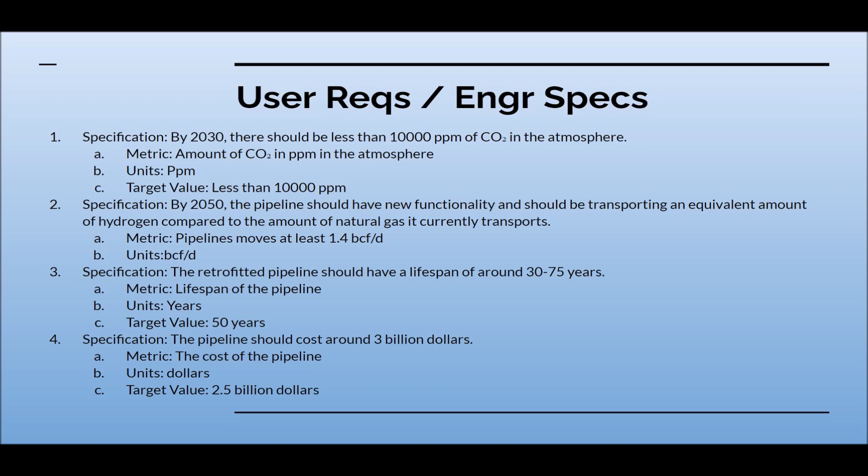The pipeline should cost around $3 billion, and our target value is $2.5 billion. From the case study of oil and gas pipelines, the average budget was $3.4 billion, but operating with hydrogen is much more expensive.

Pipeline projects using fossil fuels would normally gain a lot of opposition from indigenous people because their land is being taken, and in the event of oil spillage, there would be negative environmental impacts. Our pipeline uses hydrogen instead, so there would be opposition, but it would definitely be a lot less because hydrogen spillage wouldn't have massive negative environmental impacts.

Large corporations like Hyundai have started investing in hydrogen transportation by bringing hydrogen-powered vehicles into the commercial market. Commercially sold hydrogen-powered vehicles in use would decrease the amount of greenhouse gas emissions in units of tons.

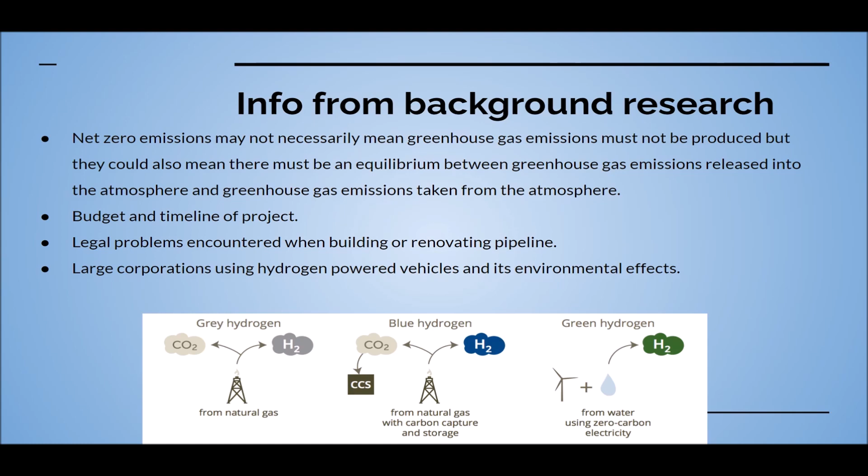We will be able to get the hydrogen by electrolysis of water and can use wind turbines to create energy to perform this process. We will use the existing pipelines as the path to transport the hydrogen, and they will be retrofitted in order to safely transport it.

The hydrogen will then be used as a clean energy source. It can be used to power hydrogen cars, generate electricity, and hopefully replace the sources of energy that cause a lot of greenhouse gases. As hydrogen is used as an energy source, the technology that will use it will increase, causing it to be a more and more energy efficient source and a viable option.

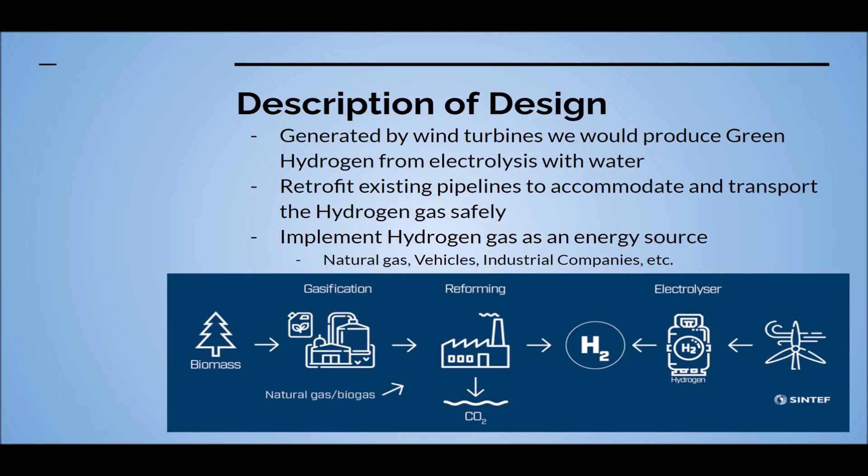Through transitioning to hydrogen pipelines, the goal of net zero greenhouse gas emissions by 2050 will be able to be met. The pipeline will need to be retrofitted to carry liquid hydrogen, but until then we'll be able to carry a blend of natural gas and hydrogen. With the proper modifications, the pipeline should have the ability to last a minimum of 50 years.

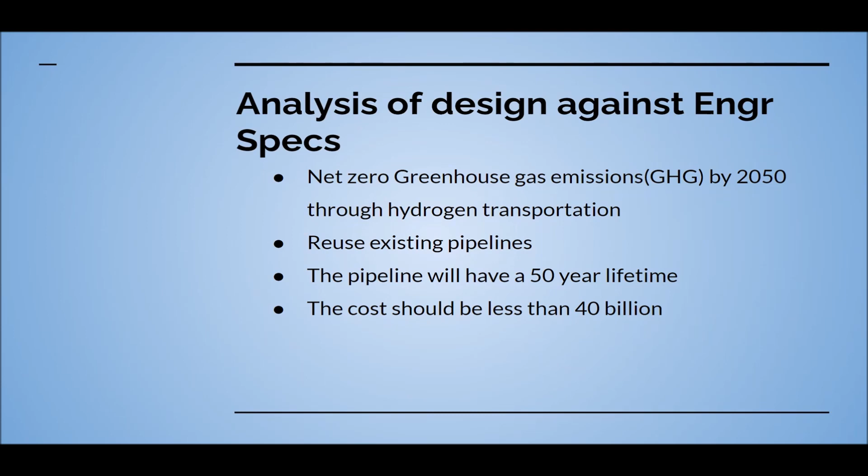Our goal is to use green hydrogen, but due to the highest cost and immature manufacturing process we prefer blue hydrogen in the first 14 years. Blue hydrogen is made from natural gas, which releases a small amount of CO2. Our goal is zero emission, but blue hydrogen is used for the transition.

We will invest $6 billion in the first 7 years, and then we will invest $2 billion in the remaining 7 years. We do the investment to convert to green hydrogen. Green hydrogen will invest $2 billion over the first 7 years. This was greatly increased with the total investment of $12 billion.

According to the previous case about pipeline budget calculation, we get about $40 billion. With the other expenses, our project is about $70 billion.

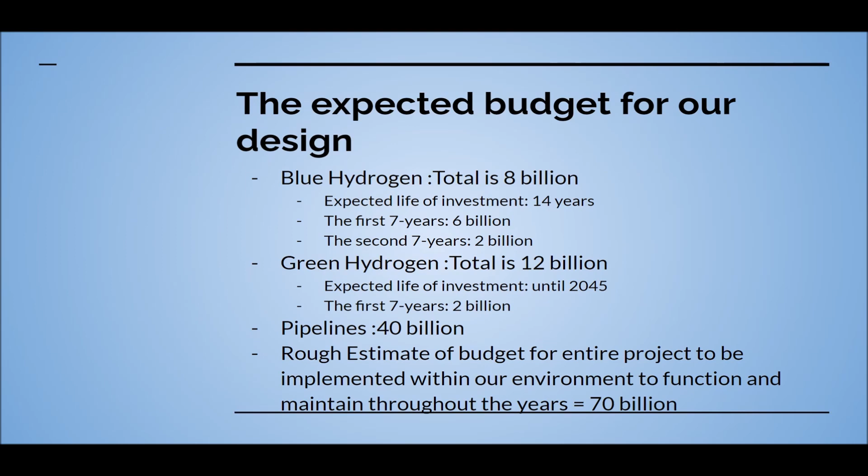Our main goal of using hydrogen as our main reusable energy source is to transition from the energy sources we are using now that are accumulating greenhouse gases in the environment to hydrogen instead. This would be implemented by switching transportation methods like cars, buses, and ferries, industrial energy, and natural gas to hydrogen instead.

Green hydrogen that will be produced will greatly impact the GHG emission problem that we have in today's world by helping with this reduction process and aid in our goal to reach zero emission by 2050 due to hydrogen gas burning cleanly.

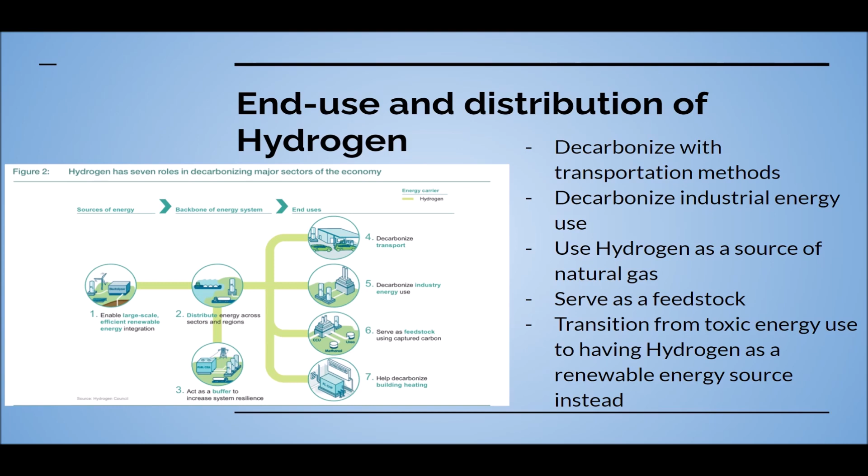As the implementation of hydrogen-fueled cars and buses comes into play, adding about 100,000 hydrogen fuel cell electric cars will reduce GHG emission by 294,000 tons. On the other hand, incorporating about 5,000 fuel cell buses will bring 450,000 tons of carbon dioxide down from the environment.

There would be many benefits to using hydrogen as a main source of energy, as there would be many job creations coming from it. There would be roughly around 1,000 new job positions created due to the power systems and the hydrogen fuel cell sectors in British Columbia alone.

As hydrogen is a fairly well-rounded source of energy, it would be able to be reused for many years and will greatly help with lowering GHG emission in the environment. The design and fuel cell sectors will roughly generate $200 million a year in sector revenue for Canada. Lastly, hydrogen is a fairly efficient source of energy, and since it burns very cleanly, it doesn't add external greenhouse gases into the environment.

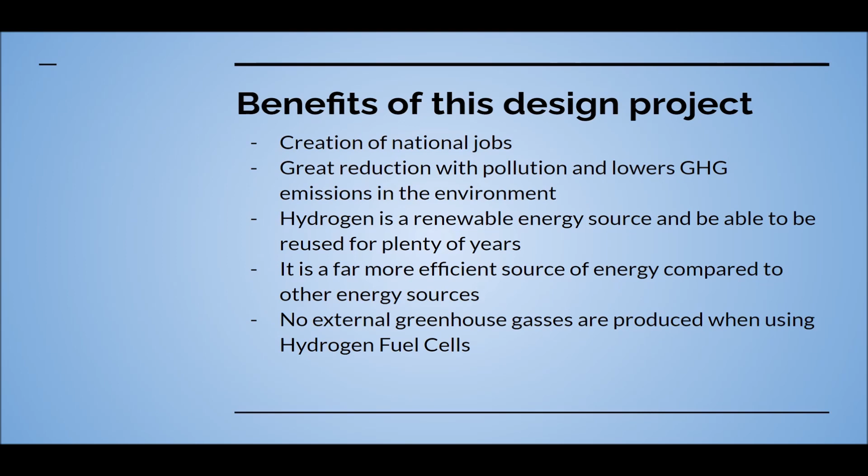Pipelines will be repurposed by upgrading their strength and using the existing pipeline system to move hydrogen around the country. Our current pipelines are already suitable for transporting blends of natural gas and hydrogen at low percentages, around 15 and 20%. This is useful as in the short term hydrogen can already be transported across Canada.

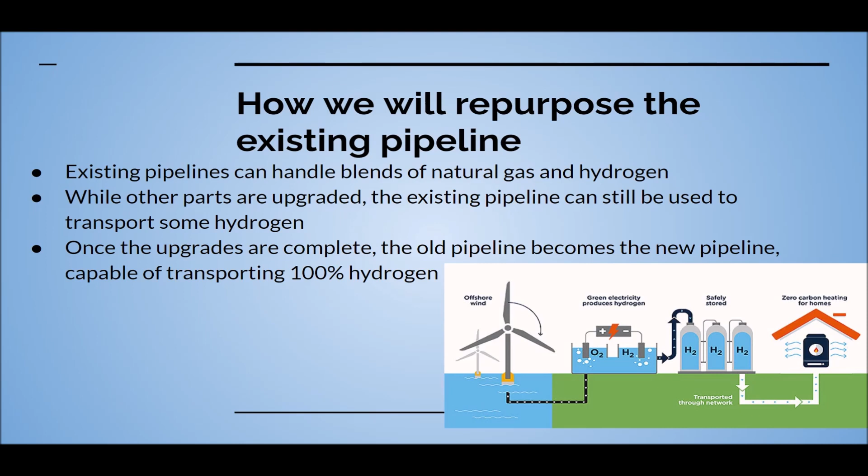The move to pure hydrogen can be done in phases, while certain parts of the pipelines are upgraded with higher quality steel in order to transport 100% hydrogen.

In general, the construction of a new pipeline project can take up to 18 months or more, depending on the length of the project. With our idea, a new pipeline is not created. Instead, an existing pipeline will be retrofitted in order to be capable of transporting hydrogen.

This retrofitting will come in phases, as some amounts of hydrogen can already be transported on day one of the project. As the project goes on, different lengths of the pipeline will be retrofitted to carry pure hydrogen, until eventually the whole pipeline can transport 100% hydrogen.

If construction is rolled out this way, there will be limited interrupted service and the hydrogen can be transported from the very beginning by blending it with the existing natural gas.